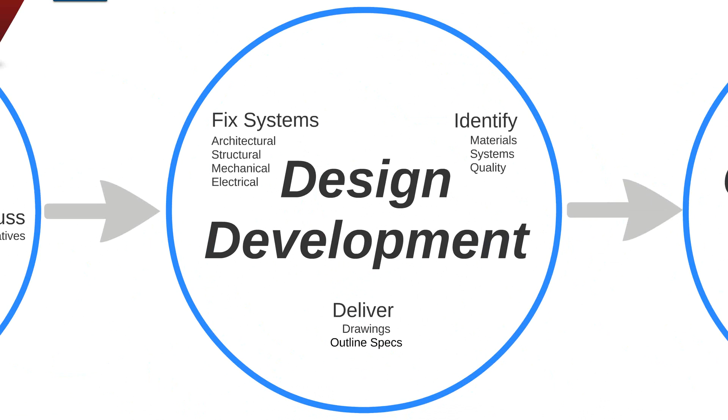So I will tell you from my own experience, outline specs are not used all that often. And during design development, depending upon what the delivery method is, we may very well find ourselves producing the first draft construction specs. That's often the case if the delivery method is a CM where they're looking to get a GMP.

And here, because we're looking at these outline specs, Lewis, what I want to do is back up and say we ought to be considering something like this: preliminary project description. This is what I'm trying to propose to most of our clients as the substitute for outline specs. And you mentioned Uniformat, and that's why, because the early estimates are often developed on Uniformat-based estimating.

The other thing about using a Uniformat is that now in your diagram you've shown very clearly beads on a string, but what we want to try to do is create an information stream that is continuous, so that it starts out as a trickle in northern Minnesota and becomes the mighty Mississippi as it dumps into the Gulf. One of the ways we can do that is in the preliminary project description.

In schematic design, we can describe the curtain wall system in very generic terms. We might have performance requirements for the U value and for the solar heat gain coefficient of the glass. But we don't need to pick a specific model as a basis of design. We don't have to narrow in on the color of the glass and so forth.

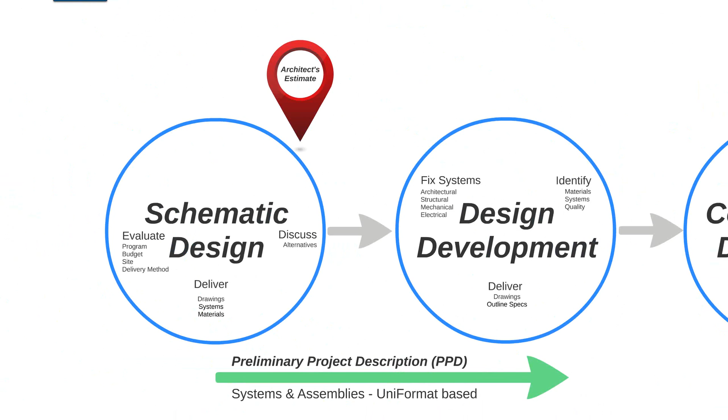We're going to come to that too. Ginger, I think we'll show how this progresses, at least in many cases. But personally, I can say that we see value engineering occurring at various stages in the process. We're actually in the middle of trying to finish a project now at about 90% CDs, and we're stuck in value engineering because we're over budget, which is not where you want to do it. But we will talk about that more positively in a minute.

Gerald Jackson asks, if the project is design build, are these phases still the same? Generally they are, although occasionally with design build, the distinction between SD and DD may get a little blurry, and they may kind of be combined into one long extended preliminary phase. Yeah, I would agree it's generally the same process, it just may be overlapping when you look at it as design build.

So construction documents - what are we supposed to be doing? We're actually supposed to be setting the detail, right? Notice it says construction documents. We're setting detail, we're not designing at this point. We're going to deliver drawings and specs, final construction documents at the end of the CD phase.

Bidding, once we get into bidding... well, let's go back one. Just to remind ourselves that in the two preceding phases, those are not contract documents as such. Here, in construction documents, is where we're going to put in the thou shalt requirements that are legally enforceable requirements to get the owner the kind of construction, the level of quality that it desires.

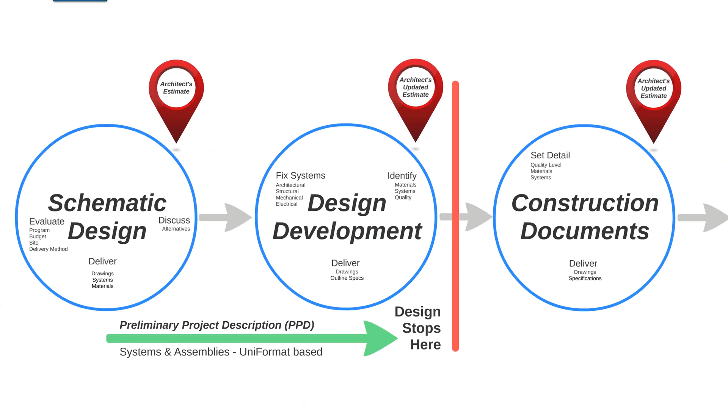Right, Lewis? Yeah, this is something I've felt strongly about for the last 30 years, and have been the ear of anybody in the various firms I've worked for that would listen to me: in my thinking there should be enough information in design development documents that the project could be hard bid or a very good GMP could be assembled. There's not enough information to build it, but there should be enough information to price it very, very accurately, and to avoid the CD becoming the continuance of design.

Right, because when we delay the design and carry it over into CD, it really becomes—the farther the design gets carried into CD, the more difficult it is to get everything coordinated and to deliver a very accurate set of documents. The other thing is it can be extremely expensive in terms of one's internal costs.

One of the things is that the AIA definitions of these three phases are really pretty vague. And they do that, and that's not without good reason, because the AIA documents have to cover everything from a one-person office who does small convenience stores and houses, up to large multi-office firms that do mega projects like my own firm.

But it would be advisable for folks in firms to sit down and think about, well, what does schematic design really mean? What does done look like at the end of SDs? And to create a document to record that—not in terms of the deliverables, those are pretty obvious, but in terms of what is the content of those deliverables.

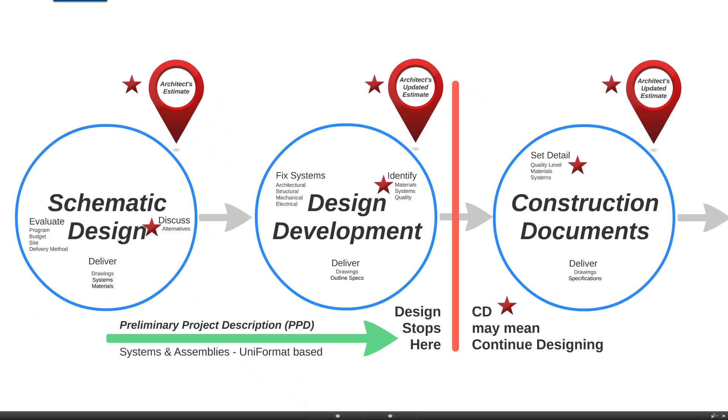Right. And one of the things that I'm actually suggesting to our clients as an independent specifier is that many times specifiers are brought in towards the end of design development, sometimes not until construction documents, but we can contribute a good deal of information to those alternative discussions and the systems and material selections because of the kind of experience we have, often on many more projects than some of the architects as our clients would get, and with a broader range so we can offer alternatives they may not be familiar with.

Larry Whitlock makes the comment that he encourages the architects in his office to use the AIA document D200 project checklist, but it does need updating. The problem with that checklist is that it is extremely detailed - immense - and almost to the point of micromanagement, and people just don't like to use it. It's very difficult to get people to use it.

What I'm envisioning, Larry, is more of a list of kind of strategic level conceptual kinds of things. It's hard to describe, but if you'll send me an email, I'll send you an example of what I'm talking about.

Okay, one other aspect I would like to touch on is that we are beginning to see a lot of design assist, and this is another opportunity certainly for contractors, subs, and manufacturers, product reps to get involved, because the architect is actually positively asking for help to be able to develop the design and the construction details, usually by the end of DD, such that Design Assist is actually producing what would become the shop drawing or the contractor's final submittal.

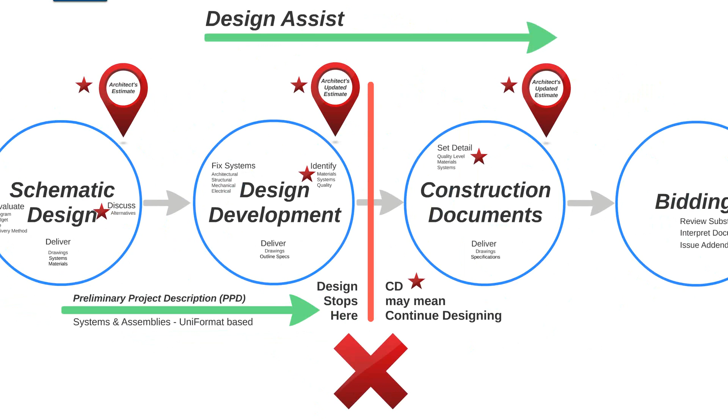Okay, so big red X, aligning with the red line for design stops here. This is usually where we're seeing GMP. And this is usually the telltale point in the project - did the GMP actually hit the owner's budget, or are we over? And more, we're actually seeing the GMPs coming in greater than the owner's budget.

And this is usually, at least on our projects, the first place where we see VE. And VE could happen from this point and any point forward. But the biggest difficulty here is if we're not engaging the entire design team, including input from manufacturers, product reps, contractors, and subs, we are constantly faced with going back and doing redesign.

And for most of the architects, most of our clients, I know they are on the hook for this redesign at no additional cost, because they're required by contract to meet the owner's budget. David, you might remind folks that when you say your clients, you mean as a spec consultant, your clients are the architects and engineers. Generally, yes. And Lewis, most of yours are probably in the same boat, right? Redesign at no cost?

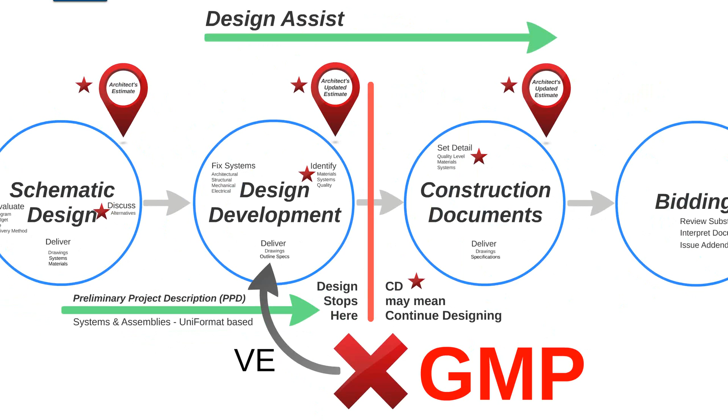Unfortunately, if we can avoid it, everybody's going to win, because who wants to do things twice? There are cost savings, but there's also an emotional cost to having to redesign and redraw, and there's the issue of whether our documents are realistic and user friendly to the contractor. Unfortunately, many contractors' favorite phrase is 'dumb architect,' so the more we can do to provide good, tight, practical documentation, the better off everybody is.

I'd like to pick up on a comment from Ginger Adams, since she asked about VE earlier. She says VE would be far more effective at the end of SD, schematic design phase, when making changes is not as involved as at the end of DD. Ginger, I agree 100%, and that's why I'm suggesting there's an opportunity for contractors, manufacturers, and product reps to be involved. Yet many times the design progresses to a point where the only way those folks can get involved is on a specific request from an architect, because they don't necessarily have all the knowledge to make a decision.

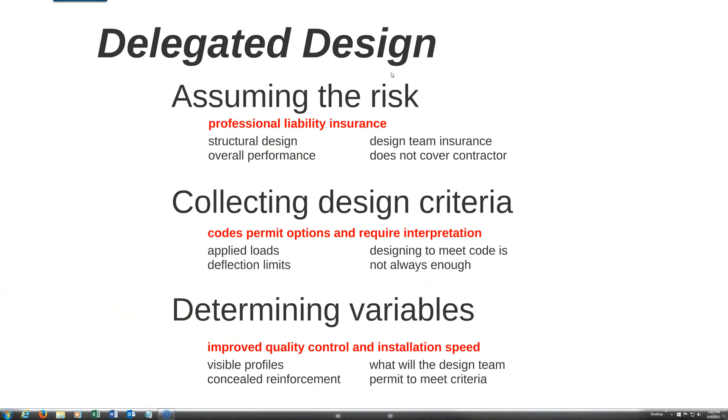Joel Nemi says, regarding value engineering, the state of Washington requires it for projects which receive any funding from the state. I've participated in several such reviews and believe that when the service is value analysis, good things can happen. It depends on the owner and design team's receptiveness. For example, one high school started as an addition and remodel, and became a build-all-new and demo-the-old for less cost. The architect's solution was to retain the just-designed new classroom wing and add new common spaces and athletics instead of attempting to remodel the old mishmash. Think outside the box, get a different opinion, and make early decisions.

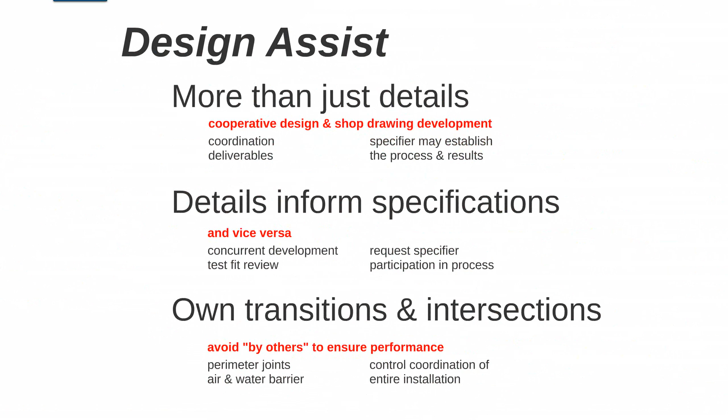The next point really is about design assist. Delegated design and design assist, we don't want to confuse those. With design assist, the contractor or subcontractor is brought on to help the architect develop detailing, to get down into the nuts and bolts, and as a result, get to what will be the final submittal the contractor makes to the architect for approval. I wanted to make sure contractors understand that the whole process is more than just developing details. It's really trying to coordinate, to make sure the documents, specifications, and drawings are coordinated, and that we're taking care of more than just the detail of the system the contractor is providing. We're also wanting to take care of the perimeter, the transitions to other materials, the intersections the system may have with other materials, and making sure, especially in the exterior envelope, that the wall and roof are watertight and serviceable for the owner's use.

Are you seeing this much more, Lewis, design assist?

Yes, we get into that from time to time, especially with curtain wall. That's one of the more common areas where we need to solve that. But we also recently designed a high-rise building downtown here in Nashville that has some interesting ACM panels that are not just flat panels, but molded into different shapes. We worked with the selected subcontractor to figure out practical solutions for how to actually build that. One of the things we're seeing from our perspective is we're writing a design assist specification package where we're defining the process for design assist and the expected results along the way, with a timetable for how to get it done and what is expected at each point along the way to finishing. I think that's helpful for architects and contractors, because it gives them both a roadmap from start to finish, and it's a way of tracking the progress to make sure they're going to end up at the right place at the right time.

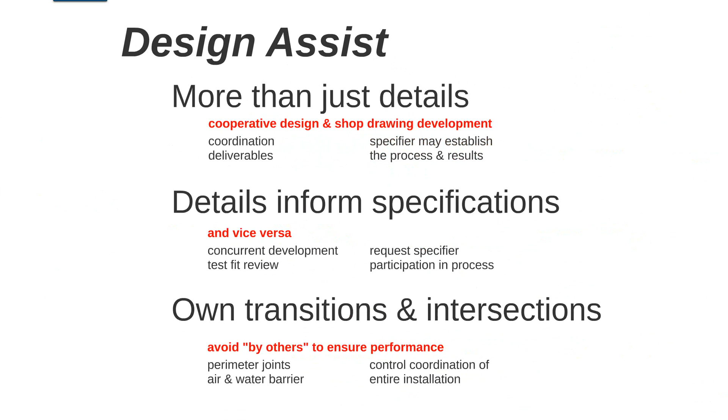Tommy Smith asks, wanting David to answer: in delegated design, does the contractor become responsible for specified results?

Well, obviously, yes, the short answer is yes. But the question is, have we given clear enough performance requirements and design criteria so that we can ascertain that compliance has occurred? Right, because your only check is against what has been specified that the contractor is obligated to deliver.

Richard Dockman said that was a question he had as to what is the definition of design assist, because it's not addressed in AIA documents.

You're right, it's not, Richard, and thanks for that comment, because that's in part why I'm suggesting to our clients, the architects, if they're going to rely on design assist, that they really need the process definition through a specification package. If it's going to work well, it's usually instituted through a construction manager, who selects a subcontractor, and the owner should actually engage that subcontractor as a paid service. At that point, through the specification documents, you have a contract document you can use to enforce that engagement to get the performance you want.